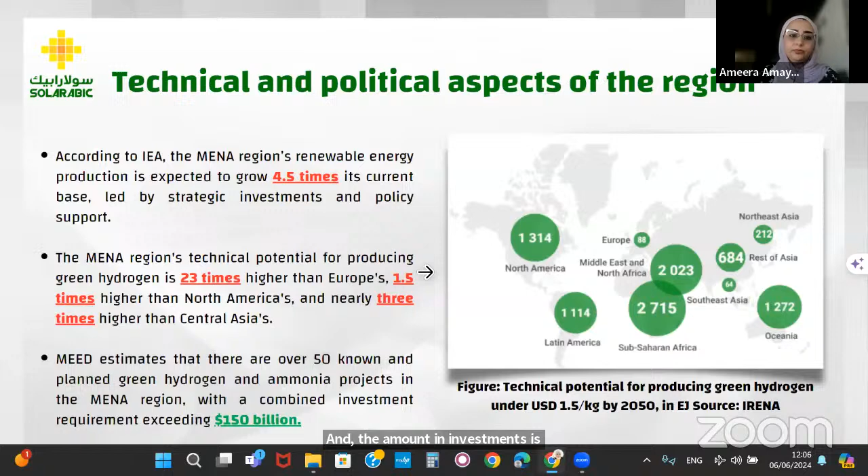Countries were aware of the potential of green hydrogen and how they must adapt to encourage and attract investments. So countries started working on developing strategies and roadmaps. Some of them started, and some succeeded and released their strategies and roadmaps. Others are still currently in development. It is worth mentioning that Jordan is currently under development but already released initial drafts, and Egypt, in addition to the strategy and roadmap, also offers subsidies to encourage investments in green hydrogen.

We can see that all the world's eyes are on our region. Worldwide, there are only 3 green hydrogen projects that reached the final investment decision stage, and 2 of them are in the region. One of them is the NEOM Green Hydrogen Project in Saudi Arabia, which is the world's largest green hydrogen project.

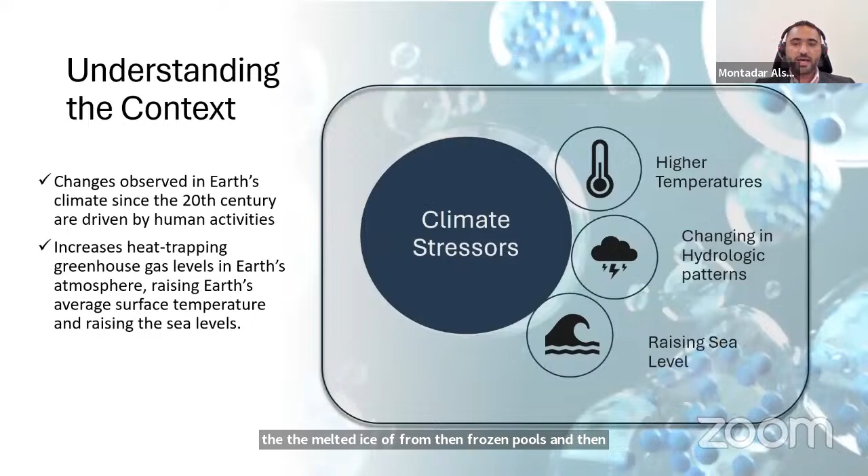So just to simply explain the issue of climate change: during the last century, the global community started to observe climatic changes such as heat and temperature rise, melted ice from the frozen poles, and eventually rising sea levels. That caused multiple issues impacting heat events, wildfires, and droughts, which in turn impacts the water supply. Due to air quality and pollution issues, we face public health risks and loss of biodiversity that will affect food production, as well as flooding and coastal cities submerging.

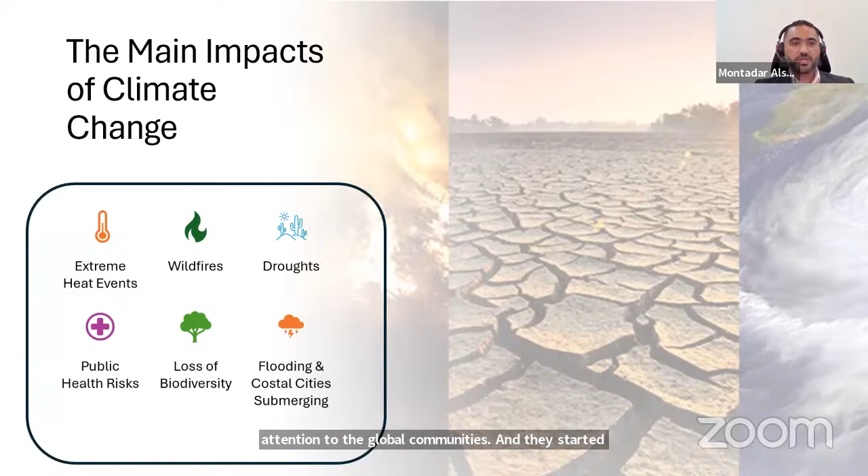I just want to highlight one severe risk here, and express the severity and explain it to the audience: imagine that some of the cities in the world are going to be submerged under the sea level due to climate change. That brought a lot of attention from the global communities, and they started to study the causes of climate change, and they found that the main cause is the greenhouse gases that act like a blanket on our Earth, trapping the heat inside the atmosphere.

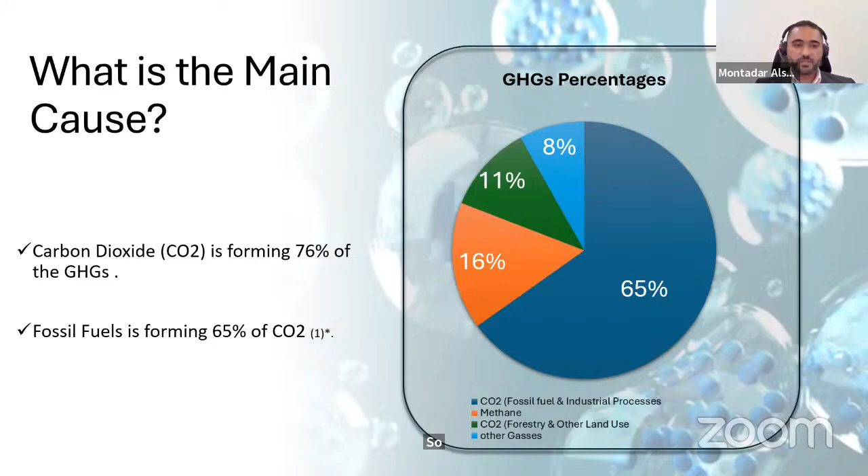With further analysis, they found that the main components of those greenhouse gases are carbon dioxide and methane. 76% of the greenhouse gases are carbon dioxide, and 65% of that carbon dioxide comes from fossil fuel burning. So global communities started to put in the effort. They paid attention to that. They collaborated together, starting long ago.

And in 2023, just last year, we had COP28 in the UAE, which presented a lot of initiatives, a lot of memorandum of understanding signings, a lot of effort and calls to accelerate the transition to clean energy. One of those mitigation actions toward the clean energy transition is related to hydrogen and green energy.

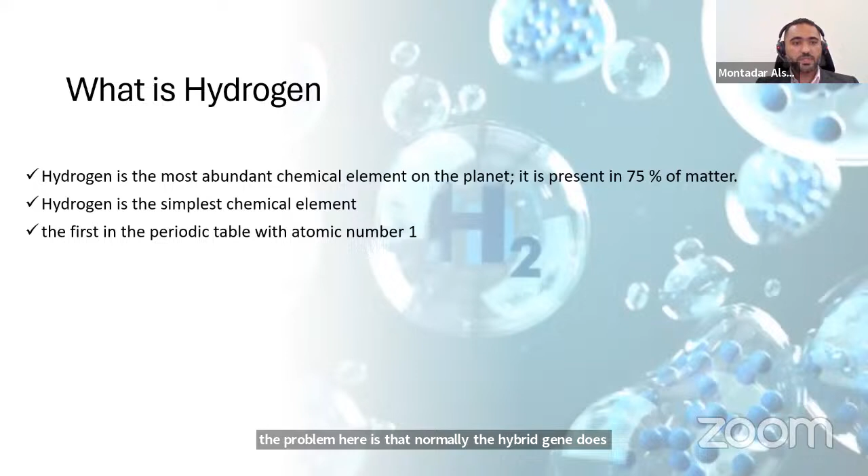So the hydrogen, I'm not going to talk about the chemical properties as in a chemistry class, but I will talk about the chemical properties as such and the availability. Due to the chemical properties and characteristics of hydrogen, and due to the availability and simplicity of this element, it has been chosen as a good candidate for fuel. But the problem is that normally hydrogen does not come alone. It comes with a certain process to be extracted. And based on the extraction process, we code the hydrogen.

For example, we have here three types of hydrogen. These are the three main types, although we have more, like pink and yellow. Gray hydrogen comes from the extraction process from methane, when it's reacted with steam to separate the carbon and hydrogen. But this process is not fully clean, as it emits carbon. When we add carbon capture and storage technology to this project, which is steam methane reforming as an example, we come up with a cleaner process and cleaner hydrogen, and we code it as blue hydrogen, okay?

But the main focus of our webinar is going to be green hydrogen. Green hydrogen is considered the purest form of hydrogen, as it's generated by renewable energy, a combination of solar and wind. We usually use the electrolysis process, using water to separate the hydrogen and oxygen. That will not produce any carbon, and it can be collected, it can be liquefied in another form like ammonia by combining it with nitrogen, and it can be stored in large quantities. It can be transported also. So we can say that this is a perfect candidate for a fuel carrier.

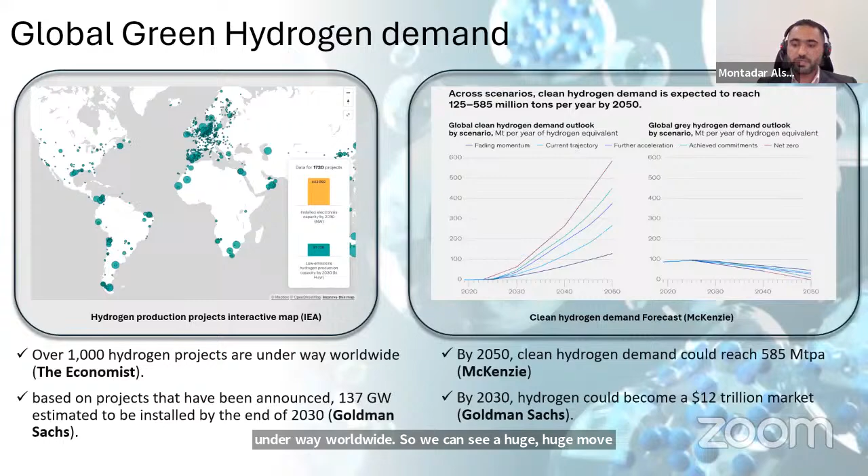When it comes to regional green hydrogen initiatives, there are a lot, and probably some of them have been discussed by my colleague Ameera, and probably will be discussed by my following colleagues. There are a lot of initiatives in the MENA region specifically, as the MENA region could become a hydrogen hub for the world.

And there are a lot of projects in Saudi Arabia and Egypt and Mauritania and Algeria and Morocco. But what blew my mind and grabbed my attention is Oman. I would take it as a large-scale example project or initiative. They will have 8 projects agreed for green hydrogen, and they are going to invest $49 billion in order to come up with those green hydrogen projects with a capacity of 34.8 gigawatts.

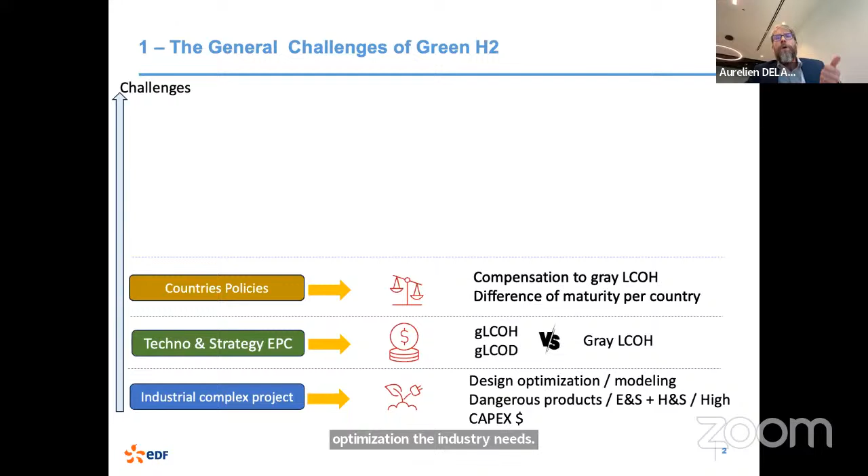So policies and regulation, for me, are the only way to make the business model fly. We need them to compensate the gap and launch the manufacturing optimization the industry needs. All this, of course, will help off-takers to take position, to make decisions and anticipate their action.

So having said that, now that we have all identified which off-takers to target, the challenge will be to get those off-takers to commit on a price that may be higher than their current feedstock cost, that will be flat because it will be difficult for a developer to take the risk to lower it under the cost of production, on a duration of agreement that will need to be long enough for the developer and the lenders to recover their investment. So that's a pretty tricky challenge to overcome.

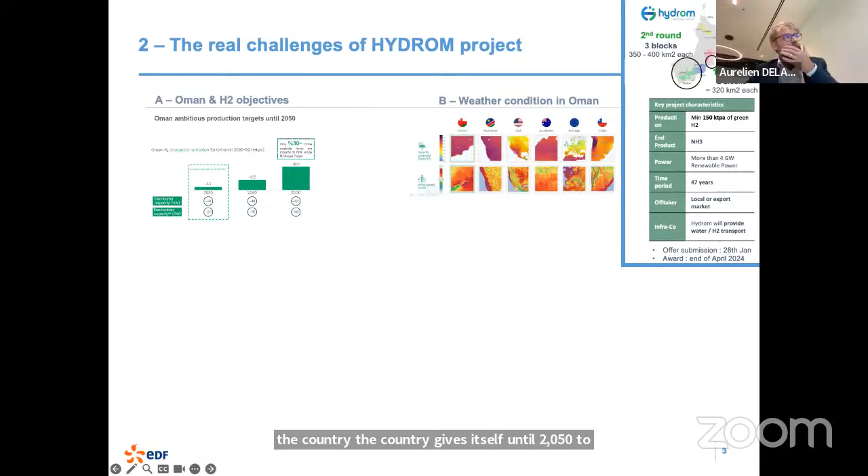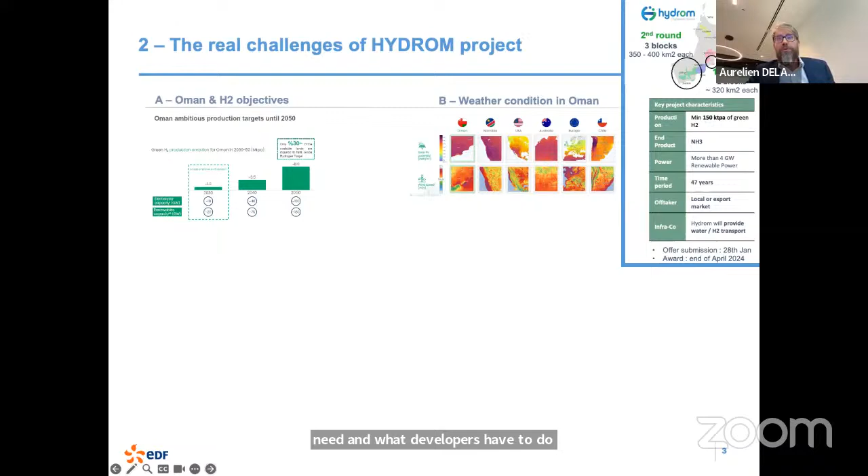Oman has defined a very clear roadmap with targets to develop green H2 and its derivatives. The country gives itself until 2050 to reach a target of 8 million tons green H2, with checkpoints in 2030 and 2040. There is a very structured frame in the auction tender that has happened for round 1 and round 2, which defined very clearly the need and what developers have to do. The east coast of Oman offers the best conditions of solar and wind, which should enable reaching among the best economics for power production.

So jumping now to the challenges, as I explained, the strength and the credibility of the consortium is key to build up the technical solution and convince off-takers and lenders. So I think we have, not to say the best consortium, at least a very strong consortium.

EDF Group is a key player in the energy transition, world leader in low carbon energy, 93% carbon free, and our renewable entity operates a net installed wind and solar capacity of more than 12 gigawatts. Yamna is a specialized green hydrogen developer, a UK developer, focusing on green hydrogen projects in Europe, Asia, and also Oceania. And we have also on board of our consortium an off-taker who's one of the largest electric power utility companies in Japan, with an installed capacity of 26 gigawatts globally and a strong commitment to decarbonize.

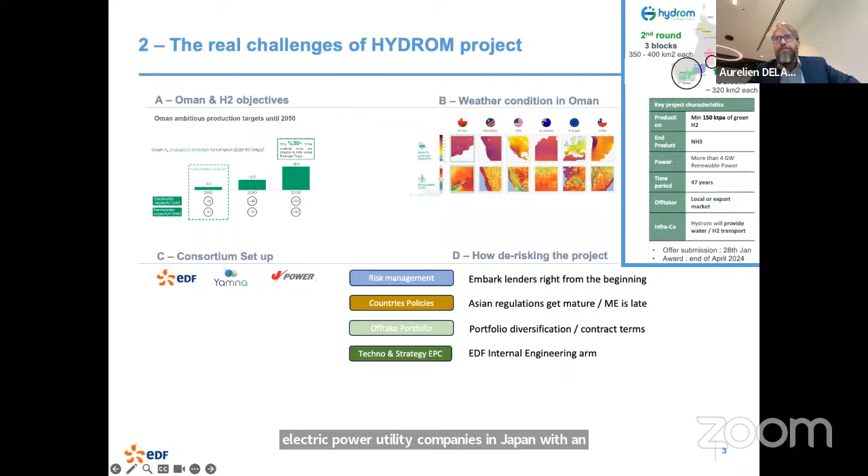So now, how to face those challenges? To start with the first one, what we have thought is that having a strong engineering team would be key. Within EDF, you have a very large set of skills and engineers to, among other things, engineer all our nuclear plants and hydropower plants. We also have some experience in gas plants, so we will use those engineering teams. We also have an affiliate called Hynamics, who's already doing green hydrogen business, especially in mobility. So we will use that strength to secure the design, the technology, and the EPC.

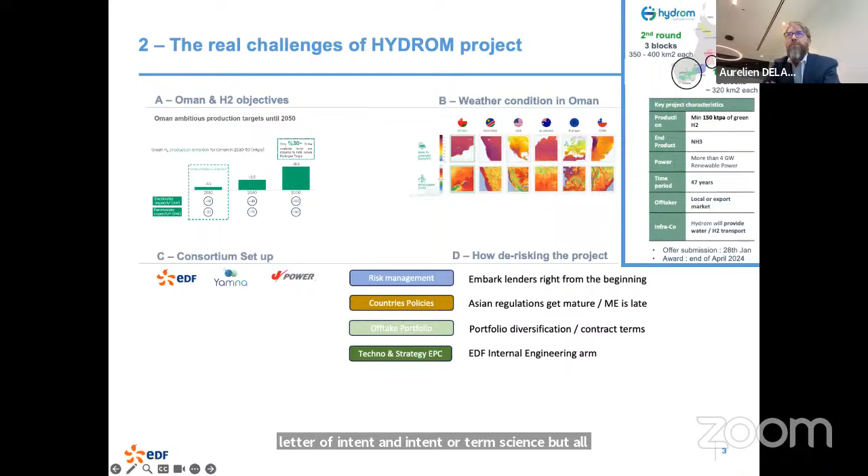For the offtake portfolio, the key has been to diversify as much as we could. What we did is we found some potential off-takers in Europe and also in Asia, in order to maximize our chance to secure those off-takers. It's a very early stage today, so we have some letters of intent or term sheets signed, but all the work still has to be done in terms of offtake. And you understood from my previous slide the challenge of offtake.

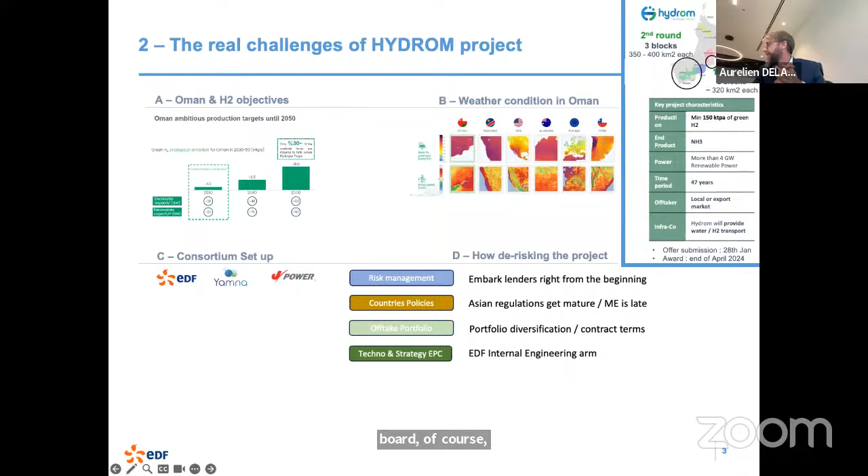In terms of regulation, as you understood, we have on board J-Power, a Japanese stakeholder, who will keep us updated on this regulation aspect. Japan is already a very mature country, so the offtake will be easier in that regard. The Middle East needs to probably wake up. There is an in-country value aspect in the Oman project that we see more as an opportunity than a constraint, for industrial development as well. And we will need, if we want to sell our products to Oman, to have very clear regulation in terms of compensation, because subsidies will probably be a key aspect of launching those projects for off-takers.

And the last one, which is risk management, as I told you, our idea is to really embark lenders as early as we can. But this one, I think we're going to take our part of the risk, not to bet, but at least take the risk to step further and reach the FID to have lenders with us.

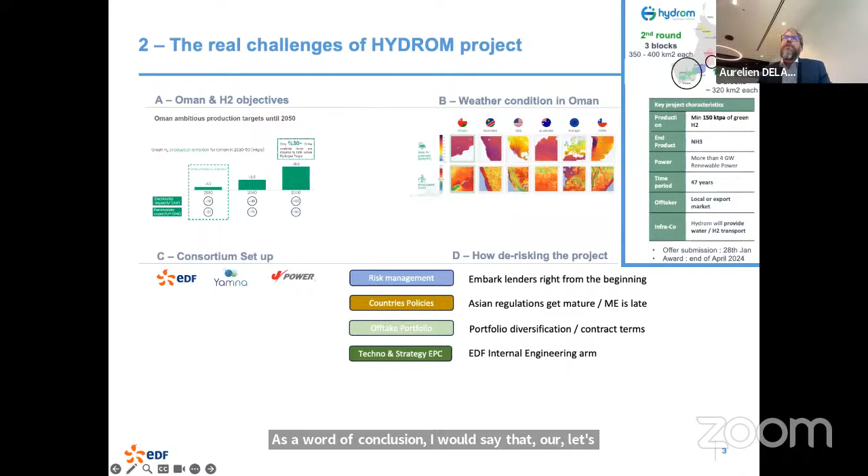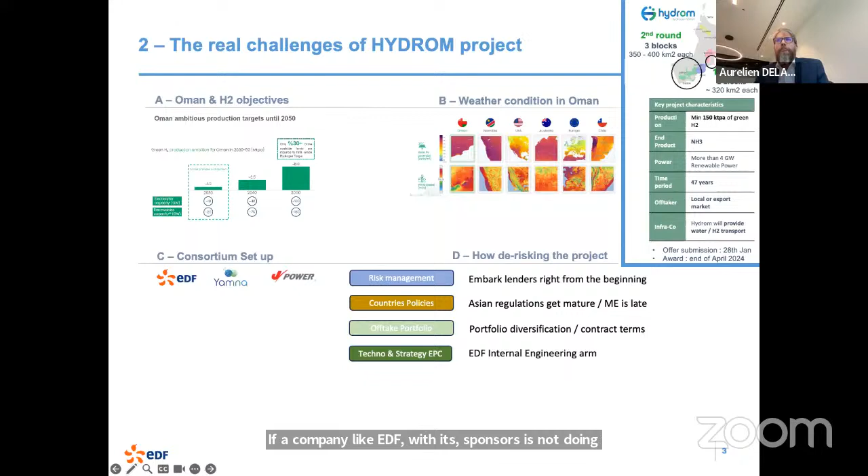As a word of conclusion, I would say that our philosophy with such projects is really to learn. If a company like EDF with its sponsors is not doing it, who's going to do it? I think to be able to reach net zero, which is also part of our raison d'être, it's important that we learn by doing. So I thank you for your attention, and I will leave you here with Hinde.

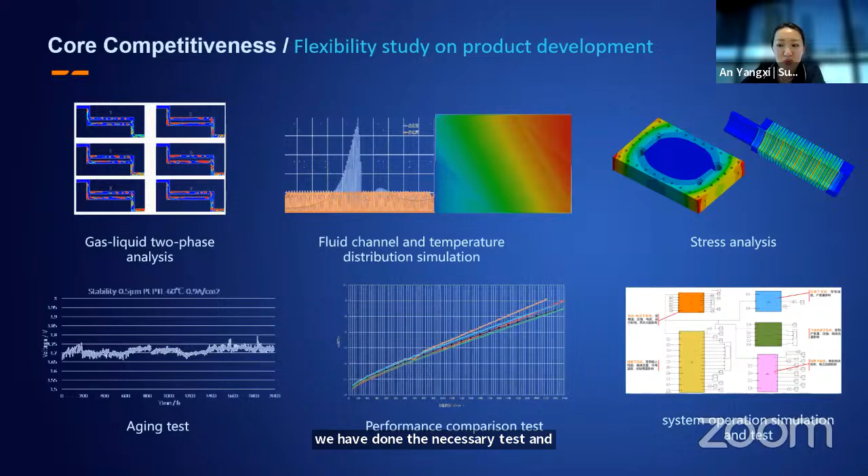As we know, people always have concerns over the stability and safety of the product. So based on our R&D center, we have done the necessary testing and analysis of the product to make sure every component is able to achieve long-term stable operation.

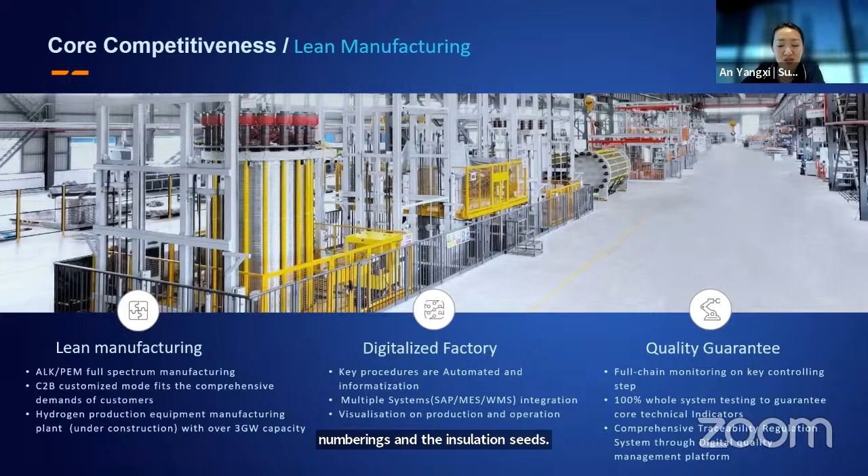Now coming to our manufacturing line. With a total investment of 600 million yuan, the company has developed automatic production and assembly lines for key components, such as the electrodes, membranes, and insulation sheets. This has enabled us to reach 3 gigawatt production yearly, 2 gigawatt for alkaline and 1 gigawatt for PEM.

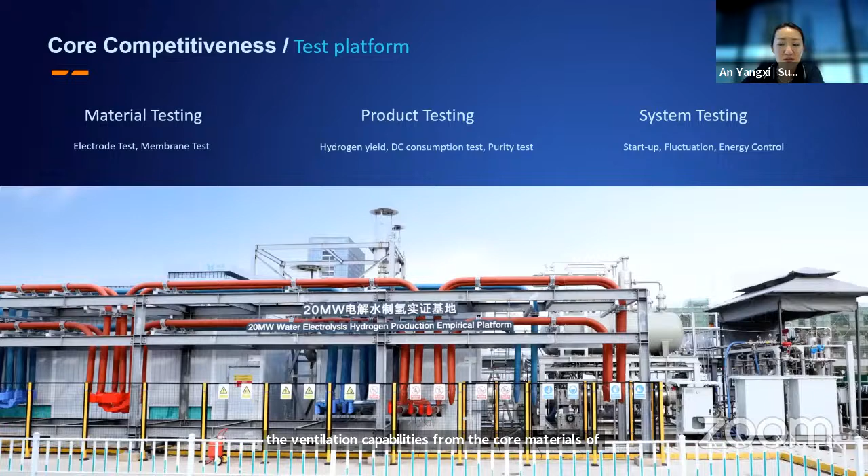As we really value our R&D and testing, we built a 20 megawatt real testing platform, which is the biggest and earliest one in China. This test farm completed and entered into operation in June 2020. The platform occupies more than 9,000 square meters with a full range of testing and validation capabilities, from the core materials of the products and key equipment for hydrogen production, to electro-hydrogen coupling control technology.

As we know, producing hydrogen is not a new technology. Even though industry applications of electrolysis for hydrogen production have a long history, getting power to the hydrogen production system is relatively simple in the traditional way. Usually we just get the electricity from the grid and only need to pay attention to the safety and stable operation of the stack.

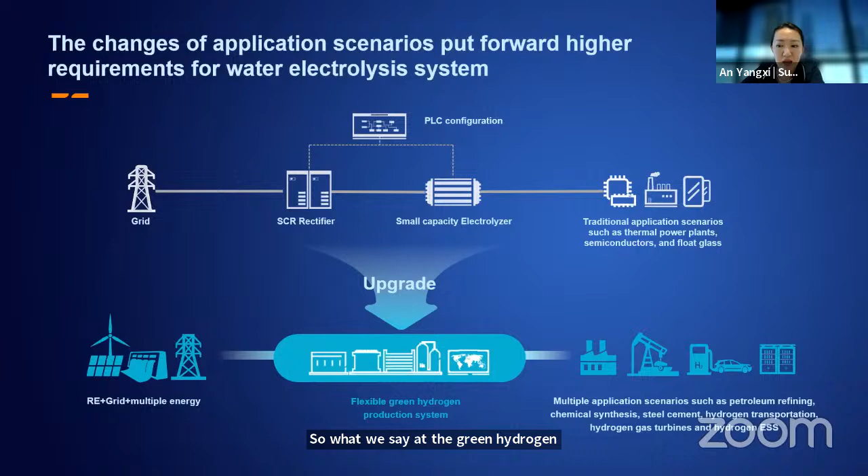However, changing application scenarios present higher requirements and challenges for electrolytic hydrogen generation systems. In the renewable scenario, we can see big changes taking place from the front end of the energy to the back end of the application scenario. When we talk about a green hydrogen production system, the front end power supply of the whole system needs to be coupled with renewable energy. There is also great fluctuation due to frequency drop, active power and reactive power stability requirements, as well as voltage variation due to demand drop and such. So the system networking and energy management is going to be a big challenge.

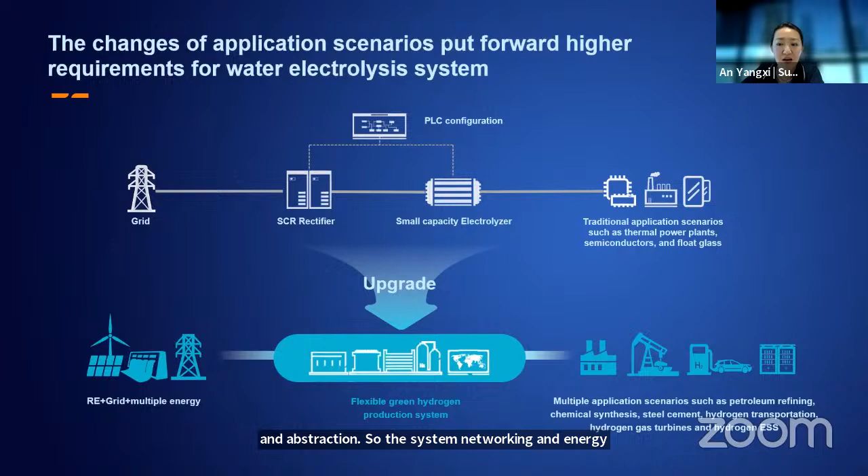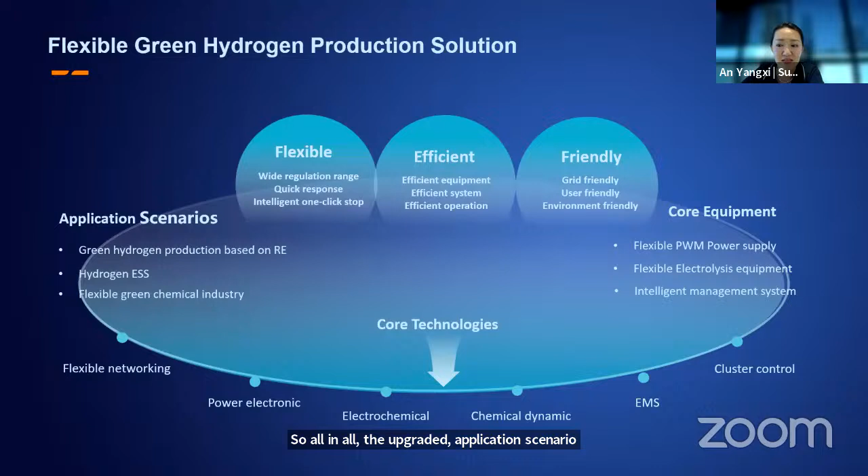So all in all, the upgraded application scenario required higher requirements for the entire production system, including high performance, flexibility, and intelligence. So how are we going to achieve high performance, flexibility, and intelligence? All right, we have two technology solutions.

Here you can see is AC coupled. We use grid supporting to generate electricity from wind or PV, connecting to our AC-DC rectifier to feed the hydrogen production system, and extra power could be fed back to the grid.

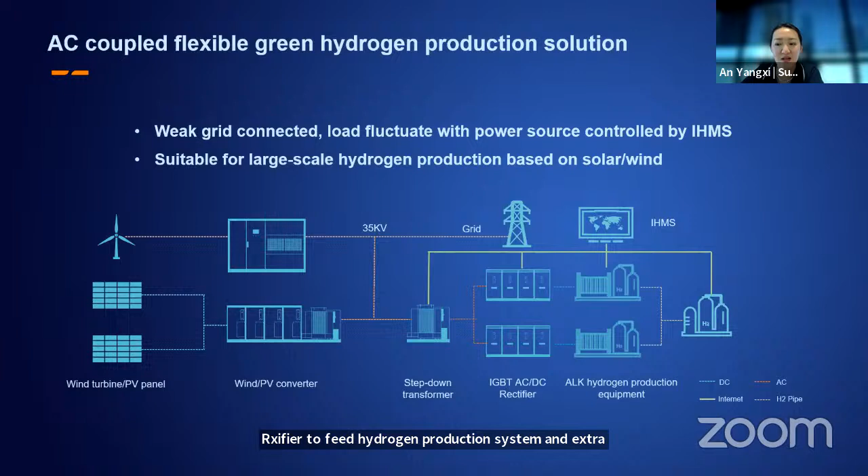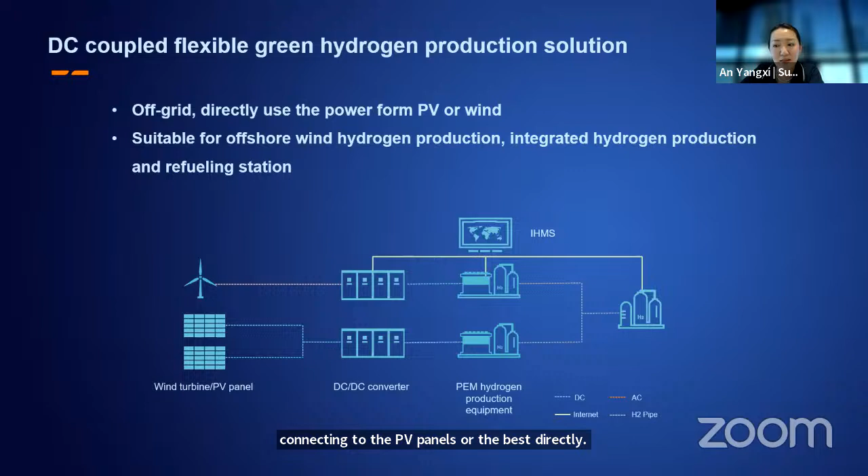It's suggested to be used in utility scale projects. Besides the AC coupled, we also have a DC coupled solution. In this way, we use PEM technology because the DC coupled system is able to connect to PV panels or the wind directly in an off-grid system. We also recommend this solution to be applied in distribution scenarios for small scale projects.

So what is alkaline and what is PEM, and what is the difference between them? All right, alkaline uses a 30% KOH solution for electrolyzing, but PEM is a proton exchange membrane with pure water. Alkaline is big, PEM is small.

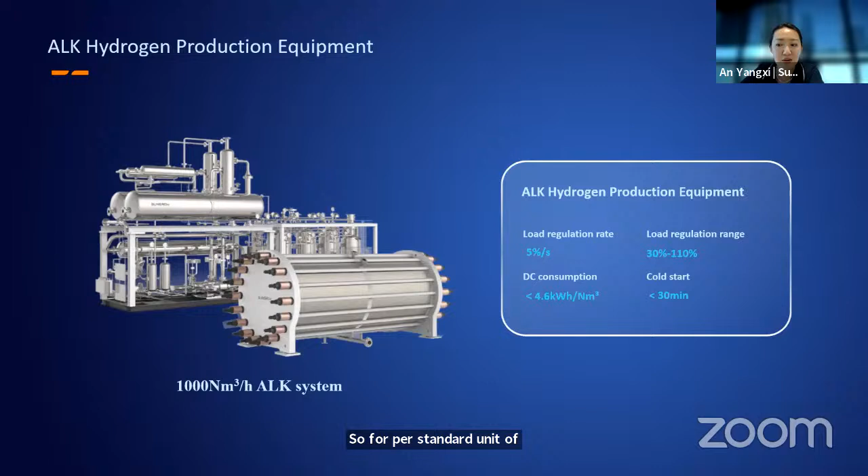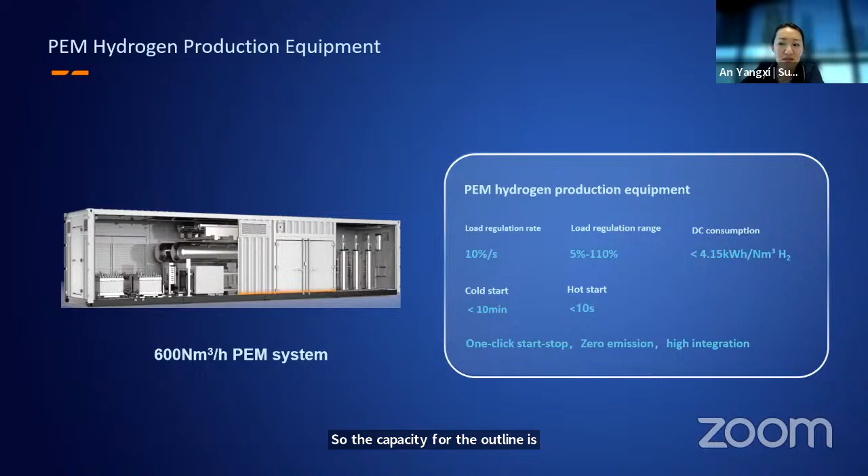So per standard unit, alkaline is 5 megawatts, and for 300 normal meters, PEM is 1.5 megawatts. So the capacity for alkaline is better suited for utility scale, and PEM is better for distribution projects. I believe that an effective management system is crucial for the success of our projects.

So Sungrow Hydrogen's EMS system not only provides a variety of essential and advanced functions, but also offers an open interface. With this open interface, the plant owner or operator can easily integrate upstream and downstream systems into the EMS system, thus achieving better data flow and system collaboration.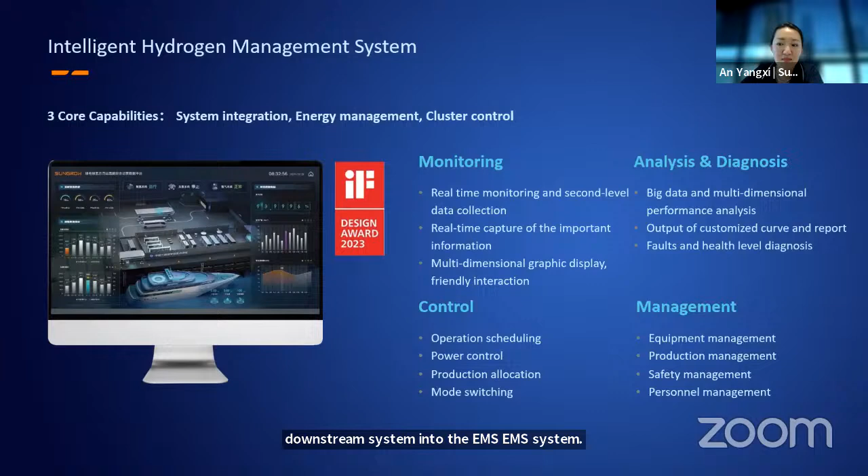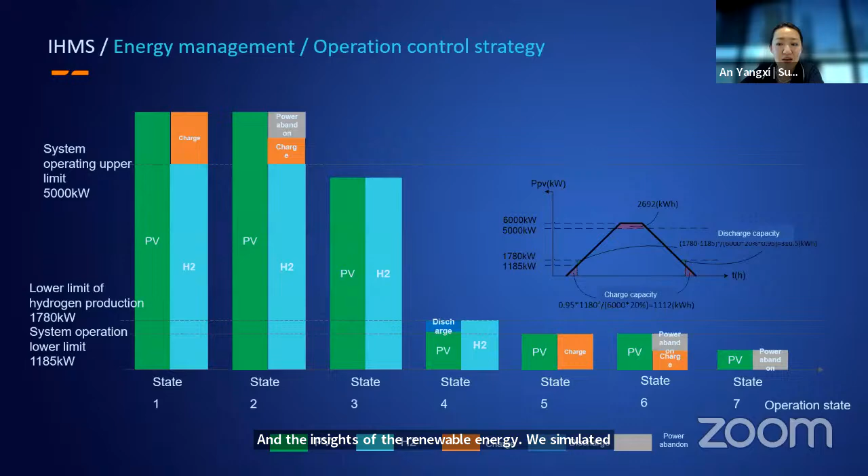Here are two example situations of the EMS system. As per our deep understanding and insights into renewable energy, we simulated 7 occasions that would occur in the process of hydrogen production from renewable energy generation. When we have many blocks of stacks, the EMS system can also achieve the cluster control function.

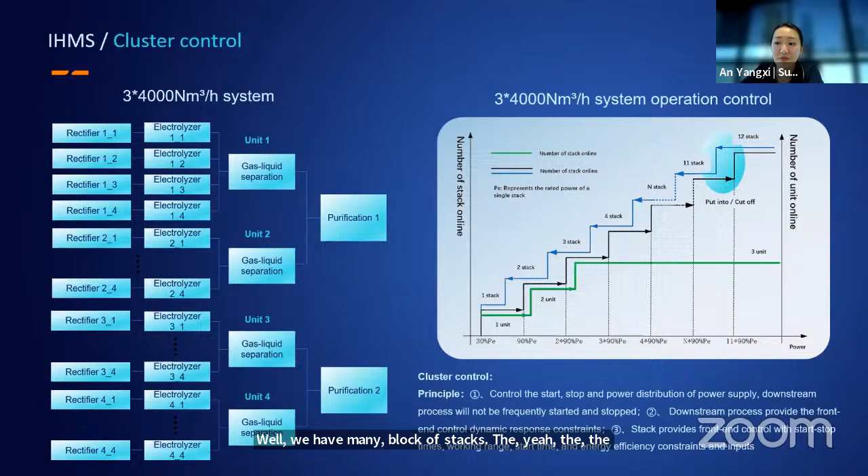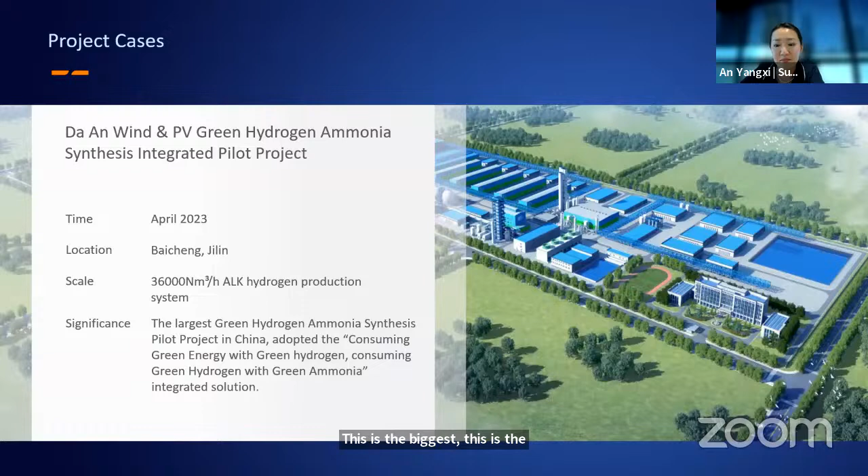Okay, all right, here are some references we have delivered in China. This is the largest green hydrogen ammonia project in China that we delivered, and also this is a cave storage of hydrogen project. We support these projects for our government.